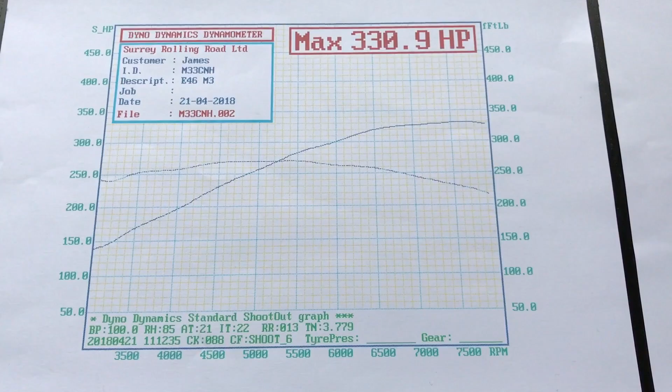It is a Dyno Dynamics, so it's quite a strict rolling road, and the car is only on a base map, like a generic CSL map, so it's not completely tailored to the car. As Charlie said, which was good news, it felt really good on the rollers, 270 foot-pounds of torque, good power curve as well.

So we're hoping if I get it mapped and get a new air filter in there, because it was the original one that came with a used kit, we could easily be looking at 345 brake. With a bit of luck, 350, but I think that will be a bit optimistic.

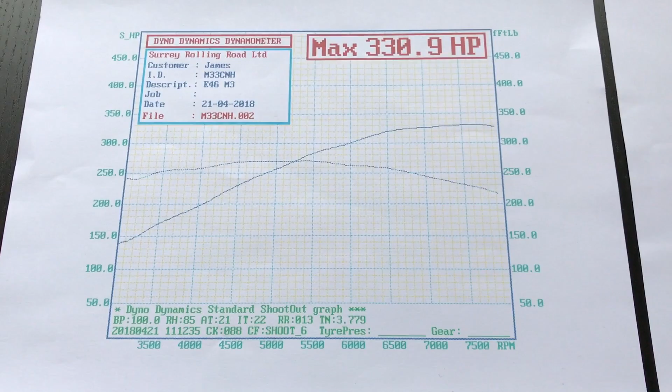Now as you can see from the torque curve, it's not completely flat, but it's pretty good. We've got a bit of power tailing off at the top, especially where it starts to richen up, which I'll show you on the other graph.

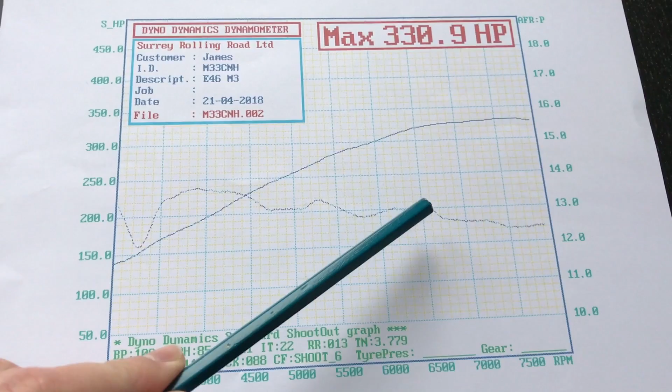This graph is horsepower versus air-fuel ratio. Normally you look for about 13 AFR, and as you can see it holds it and then starts to tail off. This is more than likely where the CSL's slightly more aggressive cams cause it to run a little bit rich up top, and the timing isn't perfect since it's just a base CSL map, so there's obviously room for improvement there.

As my car has got the standard cams and headers, we will hopefully see a little bit more with a tailored map. I'll keep you guys posted throughout the year.

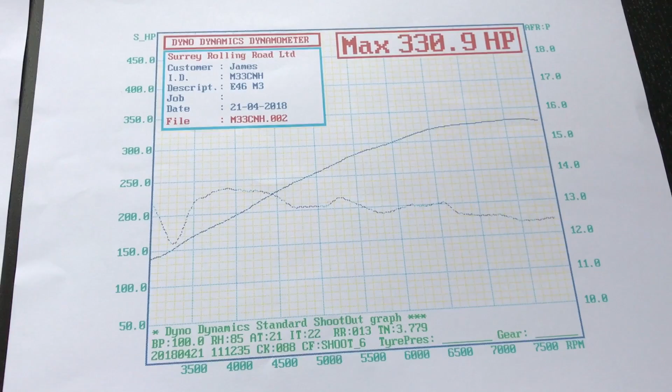It's probably going to go in for a live map. I haven't decided who to take it to yet, but there are a few options out there for who's going to be able to tailor the package, and we'll see once I've got the new air filter in there as well. So stay tuned guys.